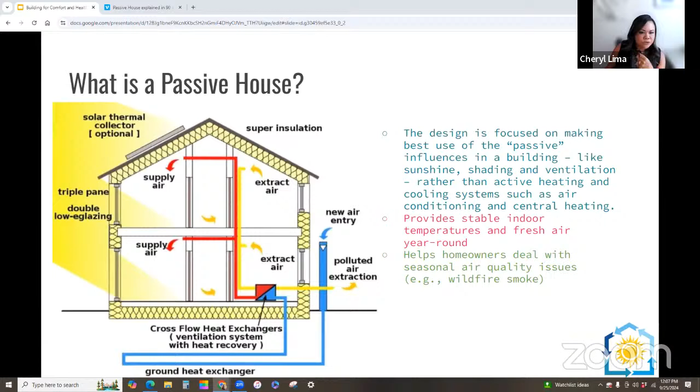So this next slide is just a quick video that explains what Passive House is. Let's see if this works. Where this works. Is this working? Okay, can we edit this part too? Oh, here we go. Passive House explained in 90 seconds.

Does your house have a heater in the basement or maybe a fireplace? Probably also a central air conditioner or maybe a window unit. Did you ever wonder if it was necessary? In 1991, Dr. Wolfgang Feist built the first passive house in Germany based on research from all over the world.

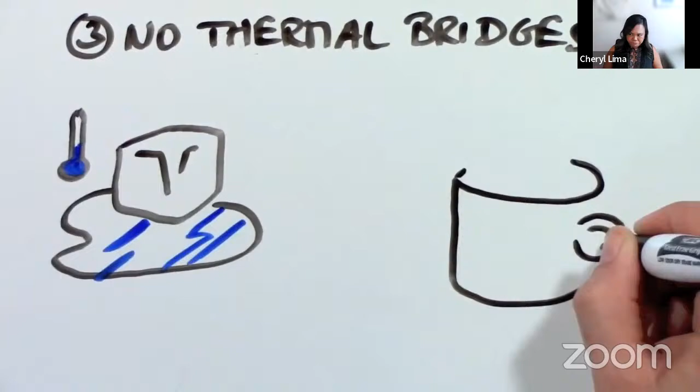Here's what he did. 1. Proper insulation. It's just like wearing the right winter jacket. It also doesn't need a heater. 2. No air leakages. There should be no holes, small or large, to let warm air out of the house. 3. No thermal bridges. A thermal bridge is like a road for heating energy in which warmth can travel right through your walls. As a matter of fact, most of our houses have thermal highways in our walls where heat can easily travel to the outside.

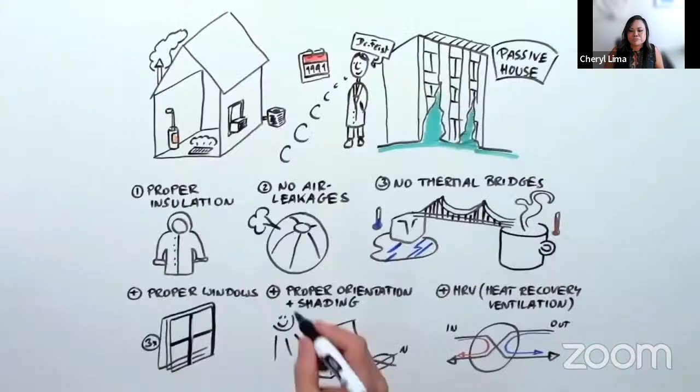Plus, the house needs proper windows, most of the time with triple pane glass, and it needs to be oriented properly so the sun can heat it in the winter and the shade is provided in the summer. And it uses an HRV, a device that provides the inside with fresh air without letting the heat out. Add all these things up, and it turns out your house doesn't need a heater or an air conditioner.

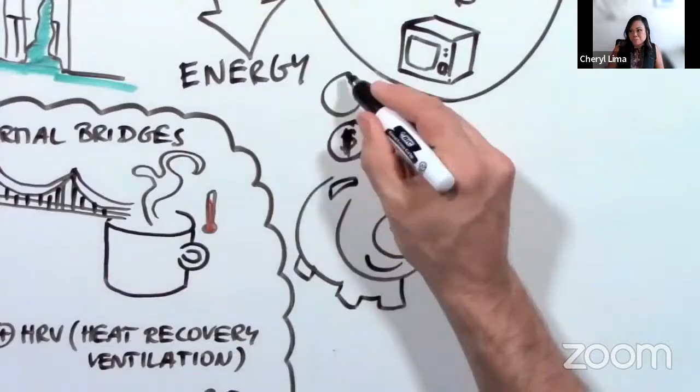So where does the heat come from? A passive house needs 90% less energy, and that can easily be supplied by your body heat, the sun, your appliances, light bulbs, and even your TV. This saves you a lot of money on your heating bill and helps preserve the environment.

Okay, so that was just a quick overview, and next I'll go over and re-describe the principles. So the first one is super insulation, or if you can sort of imagine a Yeti cooler, how the container is really thick, so it can keep your drinks cold for more than 24 hours. What this continuous layer of insulation does for your home, it keeps it warm during the winter and cool during the summer.

So this is just an image of Rockwool, a type of insulation manufacturer. For an existing home, you can replace your current insulation with a product like Rockwool, and there's also products that you can add to the exterior of your home if you don't want to break up the walls on the inside. If you're familiar with wall insulation, normally R19 is what is specified by code, whereas in Passive House, it would be maybe R45 or R60. So it's definitely much thicker than what you would expect.

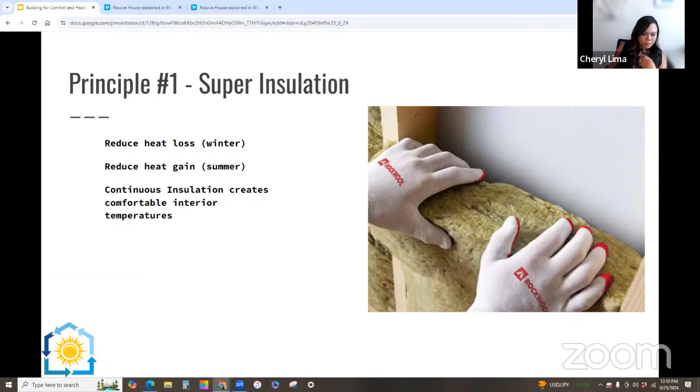The next concept or principle is airtight construction. What this does is keep any drafts out of your walls, floors, and ceilings. Sometimes on a windy day or during storms here, like in January, you can hear wind whistling into your house or around switch receptacles. So airtight construction acts like a windbreaker layer, and this air barrier is central to the performance of the Passive House and its durability.

If you think about fire season, around this time, when there's smoke in the air that you can visibly see or smell, this airtight barrier would help keep the smoke out. And not to mention ants—if there are tiny holes, you might wonder where these ants come from. It's through the penetrations that are in your home or building.

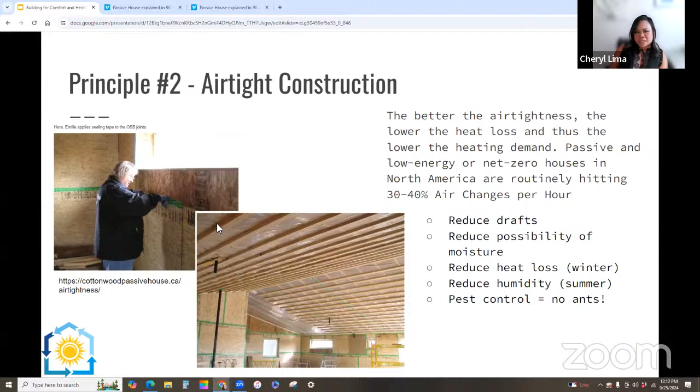So airtightness is actually tested with a blower door test. That's part of the Passive House method—all of these principles are measured to see if we're meeting that standard.

The next principle is the thermal bridge. In the illustration, it was the coffee giving off heat. In cases like at windows, or if you have a deck that connects to the framing of your house, or even nails in drywall, the metal acts as a material for heat to be lost through those points.

An inconsistent thermal barrier can create moisture buildup in certain areas. If the internal surface of your home is not consistent, it can cause moisture buildup.

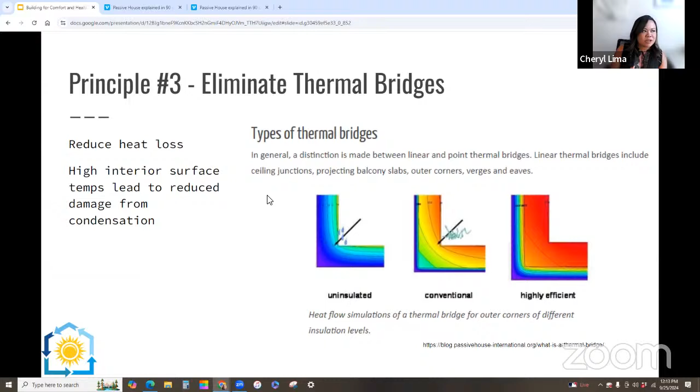The fourth principle is high performance windows. In the example shown in the video, they had a triple pane window. Here in California, or in most areas, since we don't deal with extreme temperatures like snow, or it doesn't get too hot, we can actually get away with double pane windows, provided there's enough shade in the summer months.

But with the high performance windows, that allows us to capture heat when we want it, and keep heat out when we don't, like in the summer months.

If you think of our own skin on our body—the buildings we inhabit during the day, we actually spend 90% of our time inside buildings, whether it's in an office or at a home—you can almost think of the building as your second skin. So the windows, if you have thin glass windows, that's a weak point in your skin.

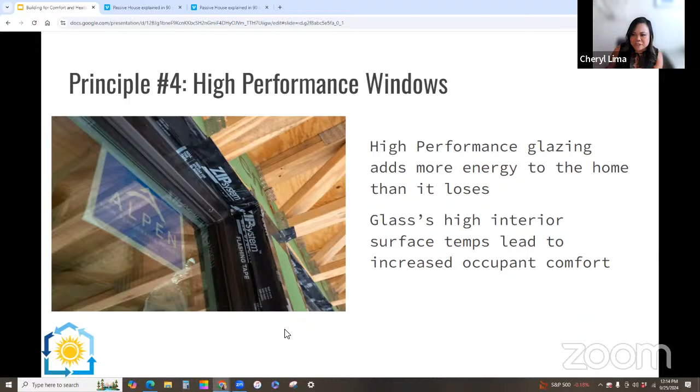Also, the benefit of having high performance windows is the quiet aspect of it, so that's helpful.

The fifth principle is mechanical ventilation. This is where you can open your windows if you want to get a sense of fresh air, but actually the air isn't as fresh as you would think. With the mechanical ventilation system in Passive House, you're taking in air from the inside and outside, filtering it, and then running it back into the home.

So you're always having clean, filtered air on a continuous basis. Especially in moments where there's extreme weather or smoke in the air, you'd want to keep your windows closed so you can filter that air out. Also allergens too—if you suffer from allergies, this type of ventilation system will help keep a continuous flow of clean air in your home.

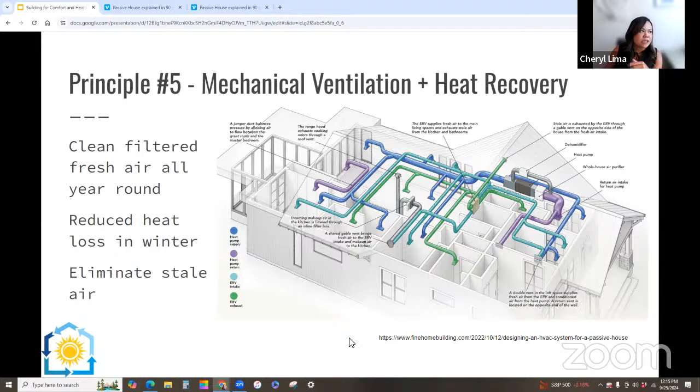So that's pretty much it. The reason I want to share more about Passive House and be more open about what's available to my clients is that at the rate we're going with construction, and what we expect from our homes, and the way we build—the problem is, you might be thinking, if it ain't broke, don't fix it, but it actually is a bit broken if you think long term about the health of our earth. If the earth fails, then where will you live?

So what Passive House allows us to do is create durable, resilient buildings that cut down energy use, lower our carbon footprint, while providing comfortable, healthy, and quiet interiors, with clean, continuous fresh air.

I know here in the Bay Area it's pretty expensive to buy a house or even think about remodeling. So with all the federal incentives going on, there are rebates available and special financing called PACE financing—that's Property Assessed Clean Energy, where you can take out a loan against the tax assessment of your home.